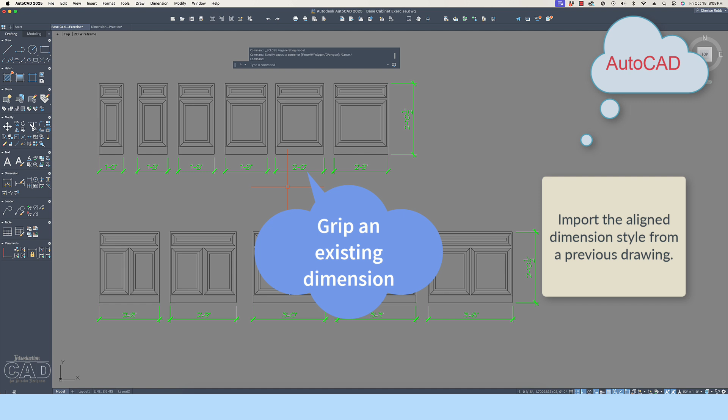Let's begin by demonstrating how to import the aligned dimension style from a previous drawing. Open the drawing in which the dimension style was created. If you followed the video, then you should also have a custom text style embedded into the dimension style, which will automatically update in the new drawing as well. To start the import process, grip a dimension. Copy the dimension. To do this, type Ctrl-C on a PC or Command-C on a Mac.

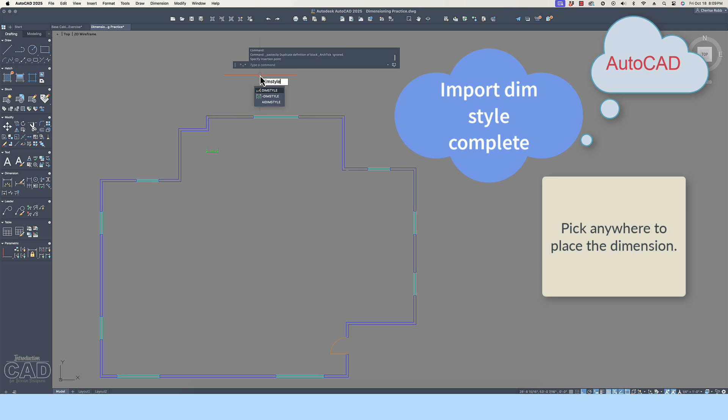Then toggle over to the new drawing. Paste the dimension into the new drawing. To do this, type Ctrl-V on a PC or Command-V on a Mac. Pick anywhere in the drawing to place the dimension. The dimension and embedded text style have now been imported into the new drawing. Make the imported dimension and text style current. Erase or delete the dummy dimension we used during the import process.

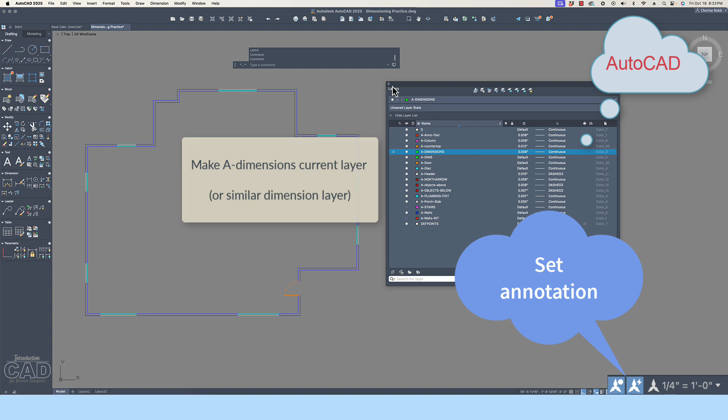Let's get started putting the rules of dimensioning into practice for this tutorial. Open the drawing provided. Toggle on the annotative dimension icons located on the lower right-hand corner of model space. Set the annotative dimension scale to 1/4 inch equals 1 foot 0 inches. Set the current layer to a dimension layer such as A dimensions. It doesn't really matter as long as the dimension follows the dimensioning style prescribed in the Industry Layers handout or the official AIA layer standards. If you do not see a layer for dimensions, create one.

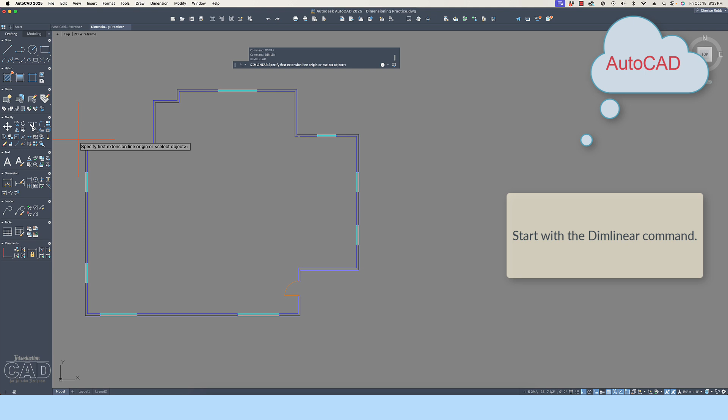Double-check that OSNAP and object tracking is toggled on, and that you have the following OSNAP settings checked: endpoint, midpoint, and perpendicular. Locate the dim linear dimension icon in AutoCAD, or type at the command line, dim linear. Return Enter key. Pick the outside edge of the wall. The next point should be the midpoint of the window. Drag the dimension up the construction line and make a final pick point.

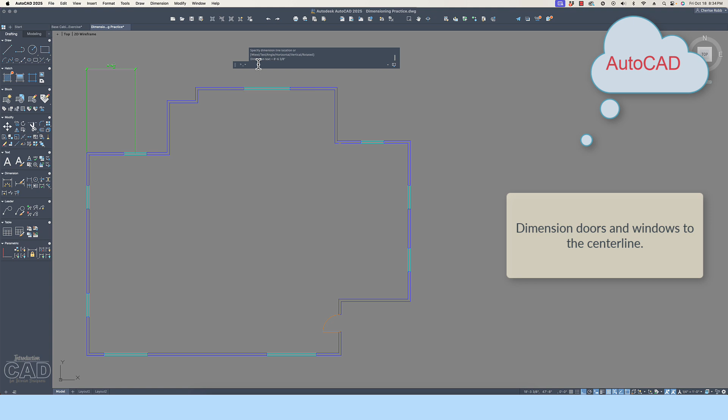Doors and windows are dimensioned to the center lines and framed by a rough opening dimension, defined in the door and window schedule. Dimensioning to the center lines of openings in framed construction ensures that the windows and doors are precisely placed. This greatly helps to avoid errors in placement along the exterior elevation. Next, locate the Continue dimension icon, or type at the command line, dim continue. Return Enter key. AutoCAD automatically builds off of the last dimension that you placed. Pick the edge of the next wall line.

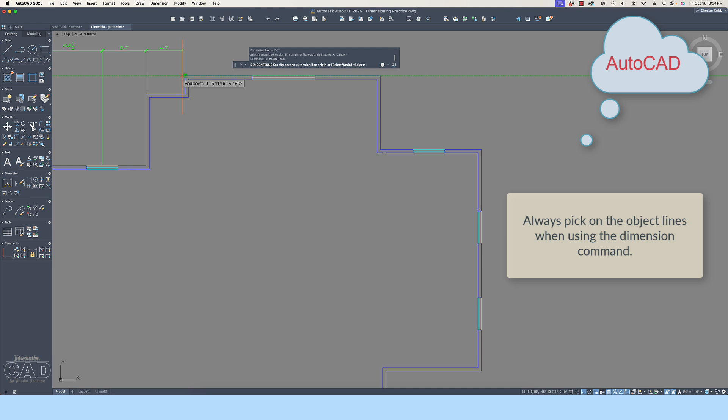Let's take a pause here. When dimensioning, always pick on object lines. AutoCAD will automatically create the gap between the object and extension lines according to the value we defined in the format settings. Always pick only on objects, not other dimension or extension lines. AutoCAD will create the dimension for you. In addition, where you pick on the object line matters. Always pick on the outside edge of the wall line you are dimensioning, instead of the inside wall.

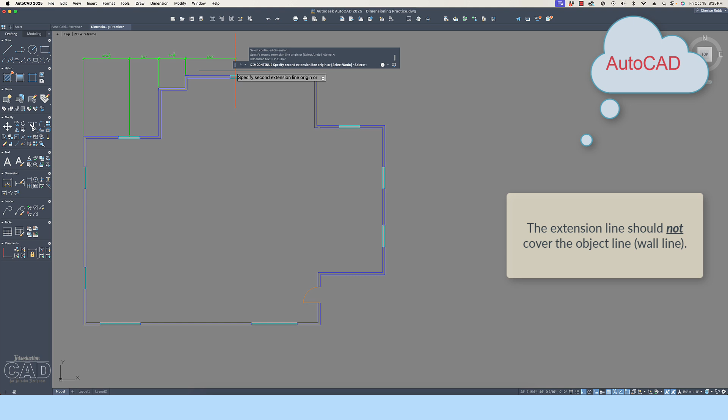If you pick the inside wall intersection as seen here, the extension line will be placed on top of an object line. This is incorrect. Instead, pick the furthest intersection line of the walls as seen here, to ensure that there will always be a gap between the extension line and the object line. Dimensions should not conflict or overlap object lines. Finish the rest of the first string of dimensions which defines all window and door openings. Pick the Escape key to end the Continue dimension command.

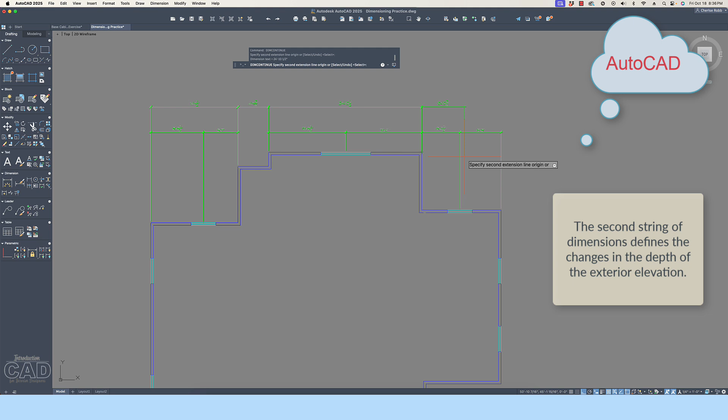Let's look at what we just dimensioned and make some adjustments. The first string of dimensions defines the window and door openings. The next string of dimensions defines the structural plane changes. Every time the wall changes in depth, such as these bump outs here, an overall dimension is required. Pick on each edge of the wall to be defined. The last string of dimensions is an overall dimension.

Repeat the same dimensioning strategies on each side of the structure. If the overall dimension is the same on more than one side, you only need to dimension one side of the structure. Do not double dimension the same thing. The final step in this tutorial is to set up the Arch D size sheet in Paperspace and set the drawing scale to 1/4 inch equals 1 foot 0 inches. If you need assistance setting up the Arch D-size sheet, refer to the previous video entitled AutoCAD Architectural Sheet Setup.